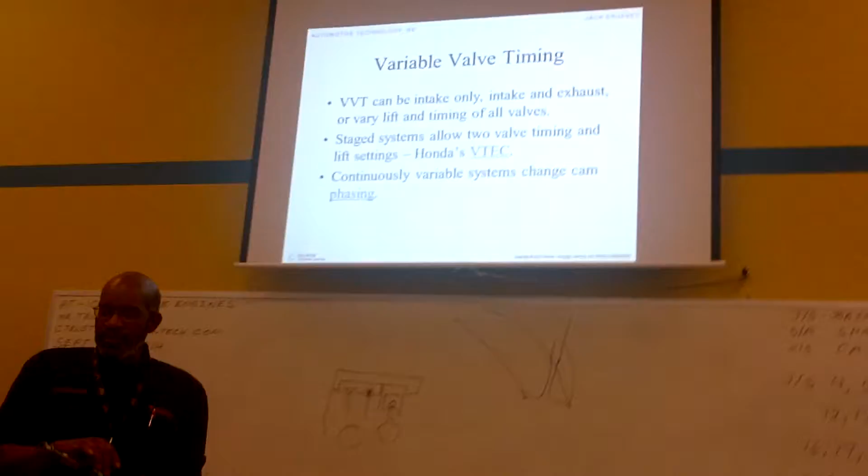Again, in most cases these are steel blanks. The bearing surface is machined down to a certain hardness. The cylinder head itself is machined where the camshafts go.

It has a special machining process that it goes through, so there is no cam bearing. It runs directly in the cylinder head.

And it's critical that the cap that came off goes back in the same position. Like most bearings, once a bearing develops a wear pattern, you must maintain that pattern. If you switch the pattern up, the bearing will wear.

So again, the service is there, but you go through the inspection process to check the bearing surfaces to make sure they're smooth, no scratches, no big scars or nicks.

The big thing here is minimal oil. There's very, very little oil that goes into lubricating the camshaft on the bearing surface. We lubricate the lobes that run on the followers - we get plenty of oil there, but the bearing itself gets very little oil. Very minimal oil is what it needs to do its job.

But some other engines may have a cam bearing, just like your rod bearings or your main crankshaft bearings would be the same thing. It could be a two-piece design, or it could be pressed into the head itself.

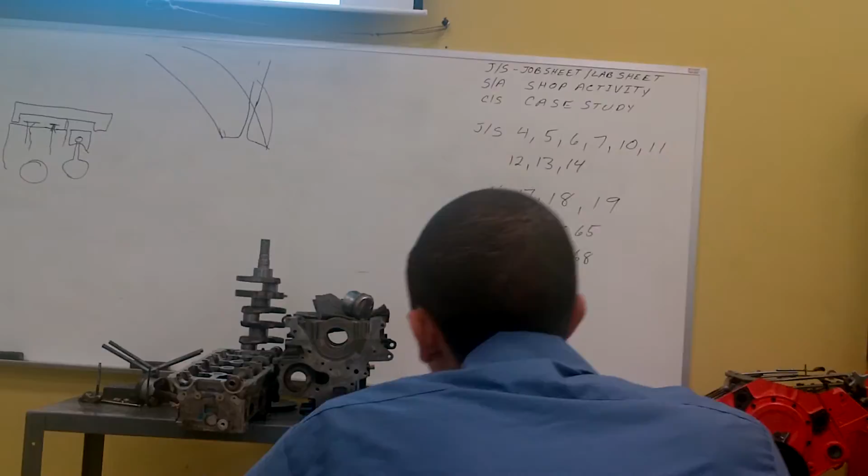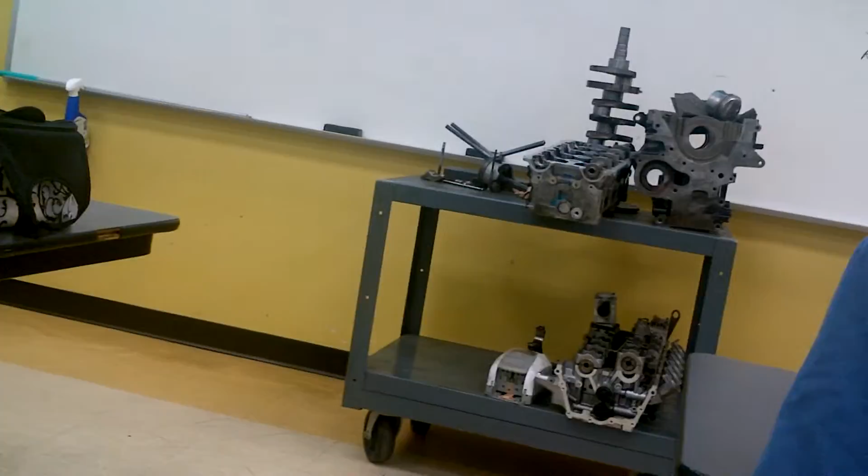A lot of times... somewhere about there. Yeah, really interesting.

Again, variable valve timing - one of the innovations to improve fuel economy. This helps with volumetric efficiency, the ability to fill the cylinder with fuel and air and to exhaust it, increasing the airflow in the engine.

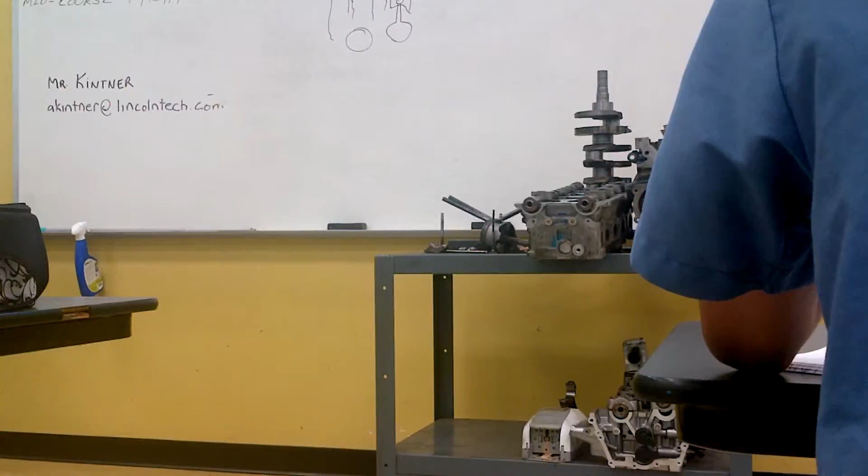Some of the other ones, the early Toyota systems, same thing - it moved. Most of them only moved the exhaust camshaft, but it moved the camshaft to a different position to allow exhausting of the cylinder, improving airflow and fuel economy.

Some of it was done for emissions purposes also, so it helped with what we call nitrogen oxides - NOx - which is the most harmful thing coming out the tailpipe. We have to reduce that; we're trying to reduce it to zero.

But the variable valve timing is really, really helping with that. Continuously variable systems alter both camshafts - we alter the intake cam and we alter the exhaust cam. As engine RPM changes, we rotate the camshafts to a better position.

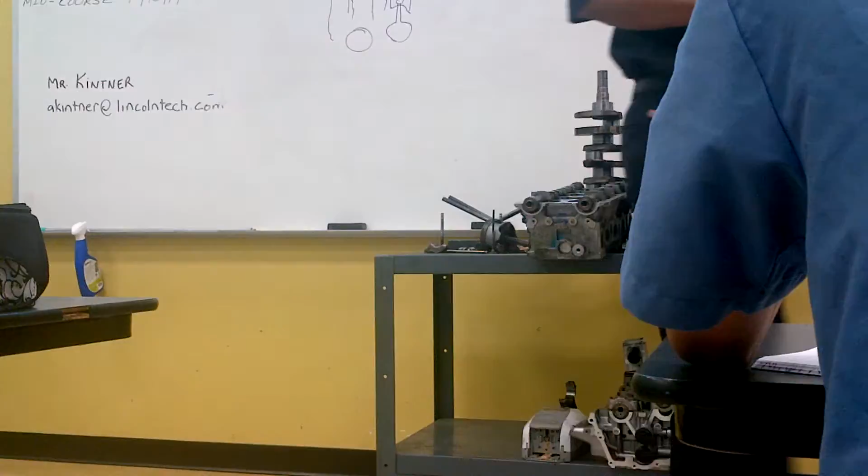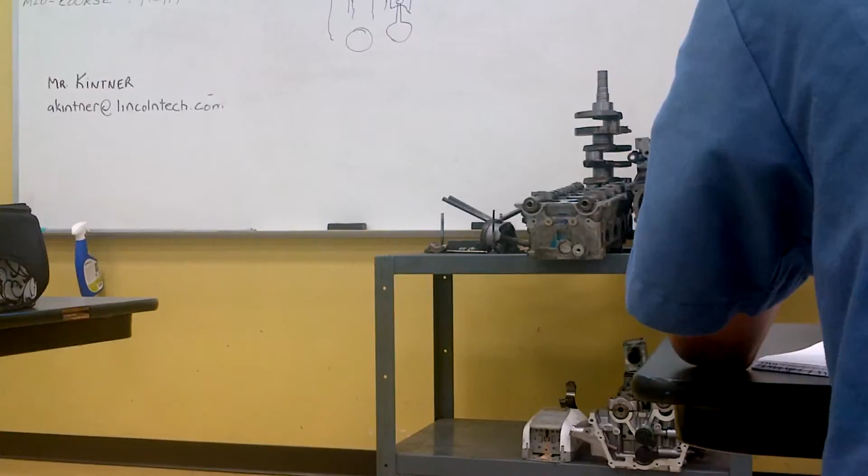And again, you vary the position, you vary the lift on that camshaft at that point in time. As engine speed increases, we can get better flow into the engine. Sometimes we call it a dual pattern camshaft or a 4-pattern camshaft - you change the pattern on the camshaft.

I also have to look at, especially on V8 engines, the problem with air distribution - how the air is distributed in the engine. Remember, if you have a throttle body at the front of the engine, it takes longer for the air to get to those rear cylinders than it does to the 2 front cylinders.

So is it good if it's a centralized engine? Yeah, it's better if it's centralized. We like them centralized because then your intake runners can be almost the same length to get the air into the cylinders without a whole lot of delay.

So if the throttle body's at the front, it takes longer for it to get to the rear and then into the cylinders. So you have that - we're talking about the column of air - that's what you run into.

So some have come up with a dual pattern camshaft. As the engine RPM goes up, we change to a different pattern on that cam to delay the valve opening until we move the air to that point.

Then you're slowing it down even at a high RPM? Right, you slow it down, let the air get there, then open it, and then fill it. So these are some of a lot of the newer stuff that's happening out there.

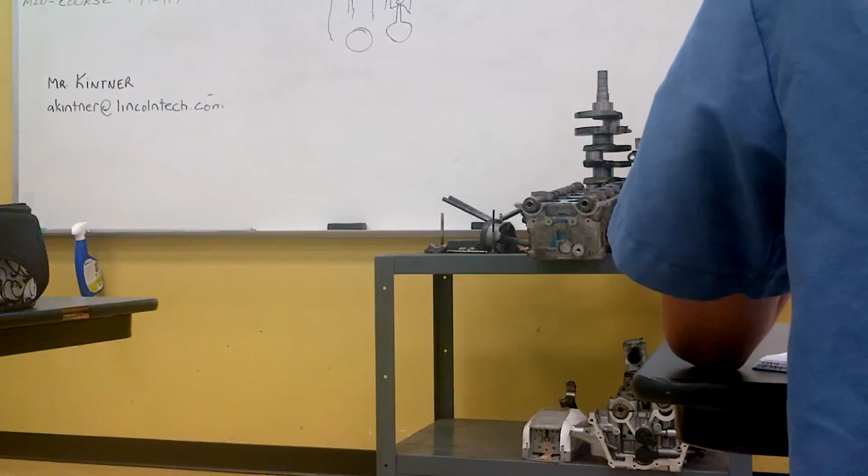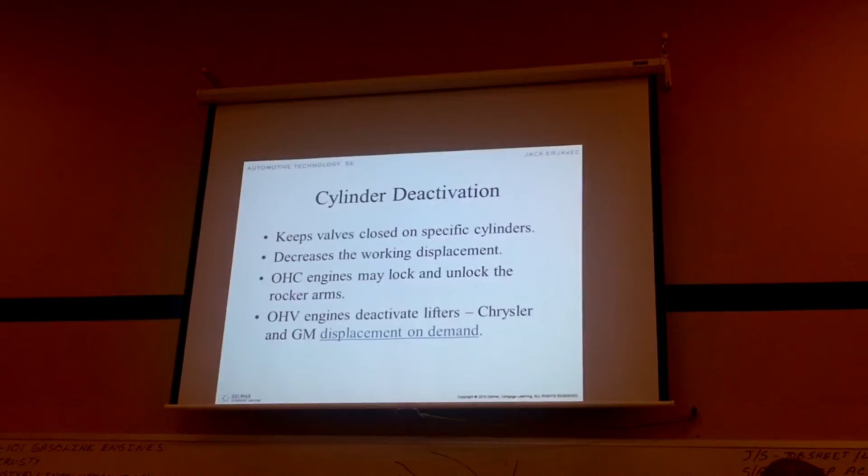Cylinder deactivation is another fuel-saving device, whereas you drop cylinders in the engine and you make the engine run at a smaller displacement at a relatively higher speed.

Not everybody, but most anything with a V8 in it has gone to this. Ford didn't do it, but GM, yeah, all the GM trucks have it, they've had it since '06. And the Ram trucks, and then the Chrysler cars, the 300, the 300C, and the Challenger, most of them have it.